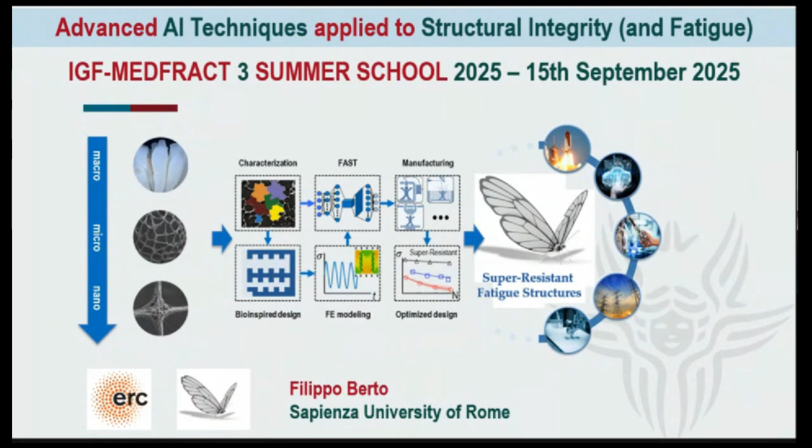Okay. So what I want to mention before is that there are a lot of challenges in fatigue design, and these challenges are at different scales. And so this has motivated us to introduce data-driven methods or artificial intelligence to approach the problem of fatigue at different scales with new advanced tools related to data-driven methods. In particular, what is less understood up to now is how the crack initiates and propagates. The way is still very complicated and depends strongly on the material that you have to treat and to face.

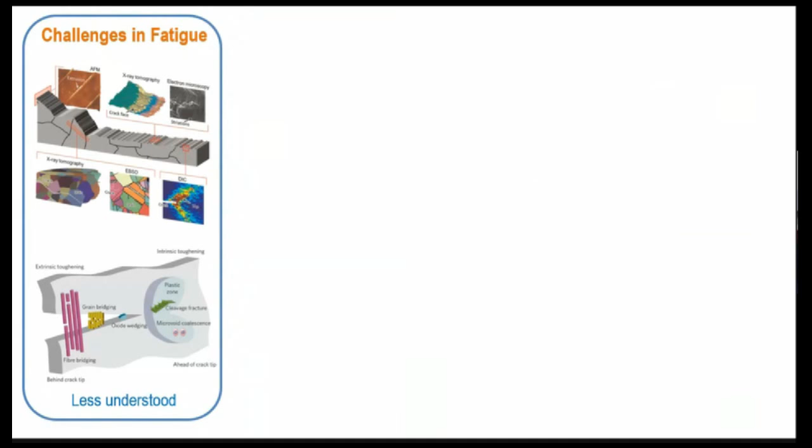In addition, another important ingredient of our study is bio-inspired design. What we have learned during the process of preparation of these projects is that natural inspired structures are really improved with respect to what we are able to produce ourselves. In particular, they are able to adapt to different situations, and for example, they are able to solve the conflict between strength and toughness, which are usually conflicting properties. So if a material is tough, it is not very strong. If a material is strong, usually the toughness is low. But natural structures have the capacity to overcome these issues, combining and enhancing these two properties together.

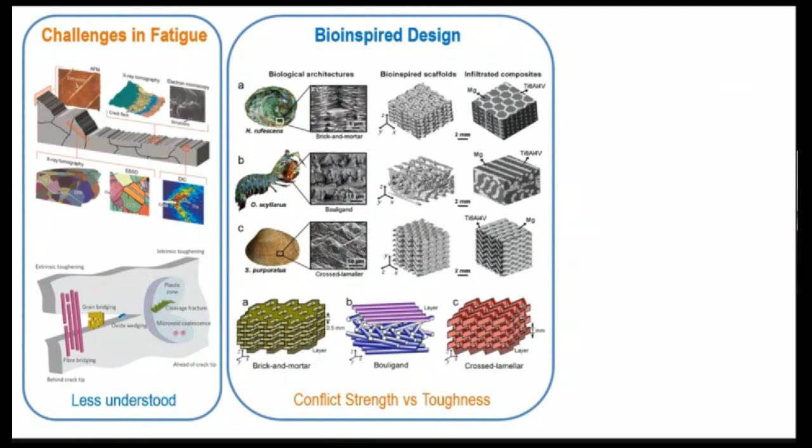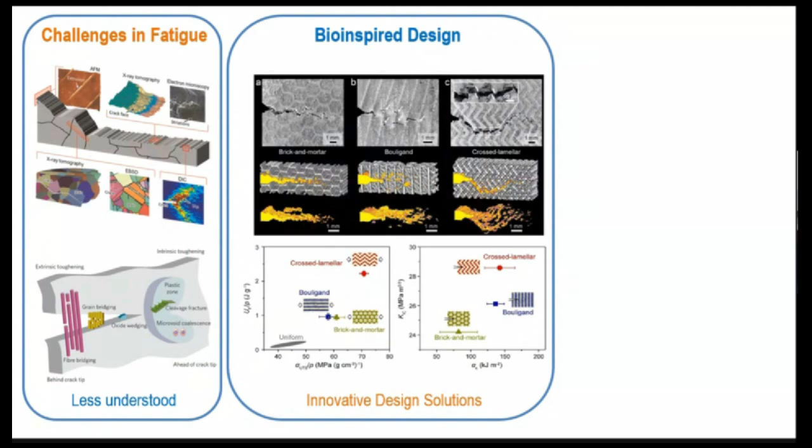So, what we have done as a preliminary study of this project was to study different kinds of bio-inspired structures and to study only the static properties to have an innovative design solution taking inspiration from nature. Okay. But of course, bio-inspired design is still at the beginning, especially dealing with fatigue, and especially in combination with artificial intelligence and data-driven methods. And we have, in fact, the possibility to have a kind of new design space that is still missing, where we can create and generate a new generation of structures able to survive for a very long time against cyclic loading.

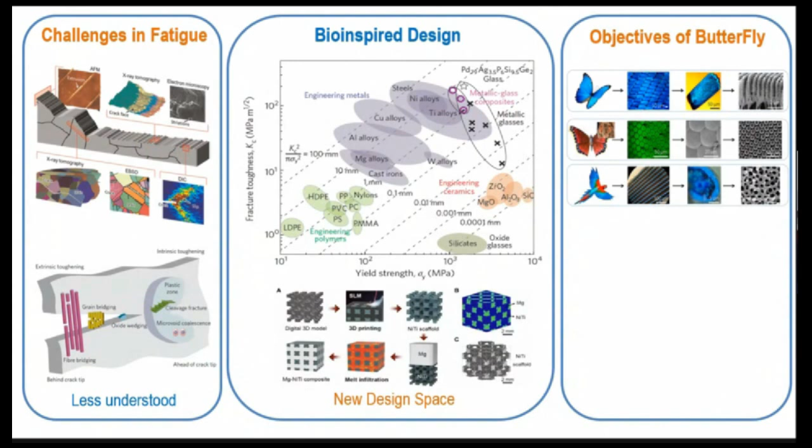So the aim of this project is taking inspiration from nature to design super-resistant fatigue structures. And we have, in fact, different examples of structures where, due to different mechanisms, for example mechanical interlocking or other mechanisms that nature is able to develop locally to improve the fatigue behavior of a structure, we are able to obtain a better fatigue life. This field is a completely new, open research field, and there are very few results, mainly due to few research groups, and I want to mention here Professor David Taylor, who is also attending this conference these days. So you will meet him during the conference. So we have also published some preliminary results on this topic.

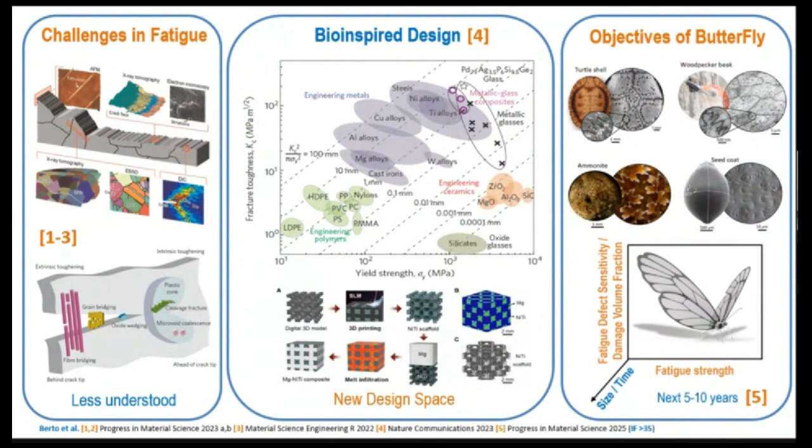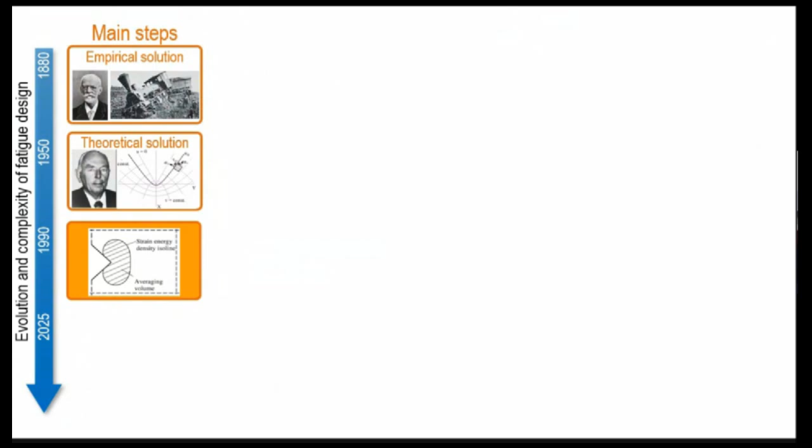What I want to mention is that if you consider fatigue and the history of fatigue, we start with the empirical solution when the first studies were carried out by Wöhler. After that, there were a lot of theoretical efforts to try to describe analytically the solution that can provide us some tools for fatigue design. And later on, we took advantage of numerical simulation and finite element methods. But now, what is happening is that we have the possibility to apply data-driven solutions. And actually, we can have fatigue in a new data-rich world, which can be a kind of revolution for studying this problem in a systematic way.

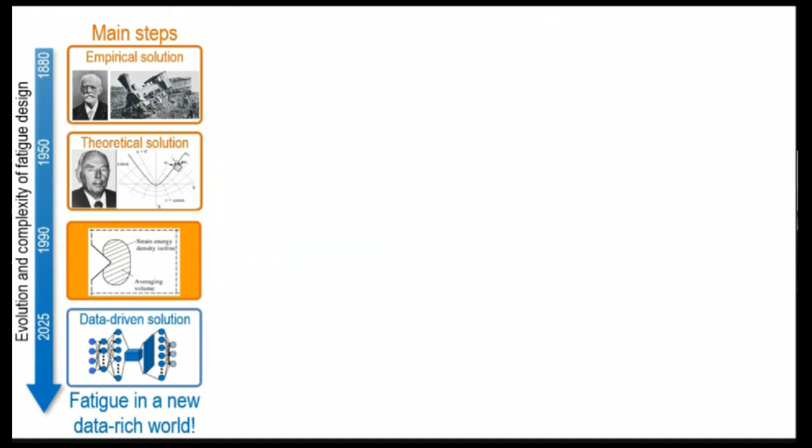Okay? So what we have done as preliminary studies was to study the metastructures of the materials, the constitutive laws, and the load sensitivity to show the feasibility of this project. After that, Marcello will give you some details of the specific algorithms that can be used to face these specific problems, and will give you some guidelines to help you face the problem of structural integrity with the use of machine learning.

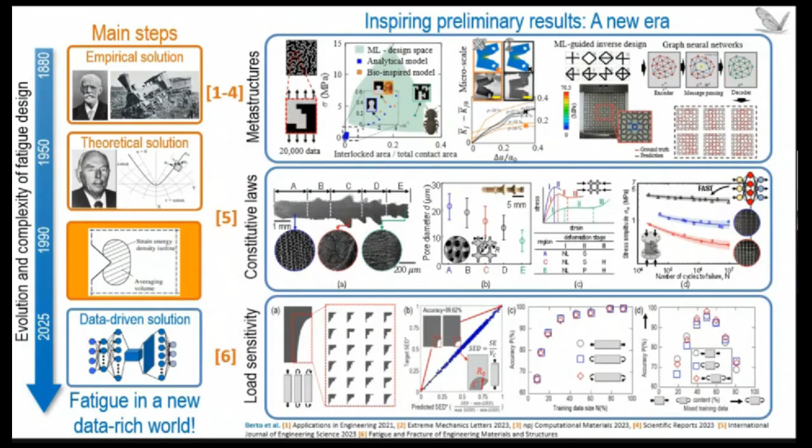Another important part of the project is that it is not only to design a good structure that is the problem. The problem is also the final production of these structures. We have a lot of advancement in manufacturing that allow us to control locally what is happening to structures at different scales. And so if we are able to find a new generation of structures from a design perspective, now we have also the tools to manufacture these structures in a proper way at different scales.

Of course, adding complexity to structures, so additive manufacturing allows us to have complex geometrical features, increases the possibility to have defects, intrinsic defects due to the process. And we need to treat them in a proper way, okay? So, especially dealing with fatigue, this plays a fundamental role.

Why am I focusing so hard on fatigue? Because if you consider structural integrity in general, 90% or more than 90% of structural failures are due to fatigue or cyclic loading. Instead, if you see the studies in the literature, for example, dealing with fracture toughness and fracture strength, you will find that 95% of the studies are on static loadings.

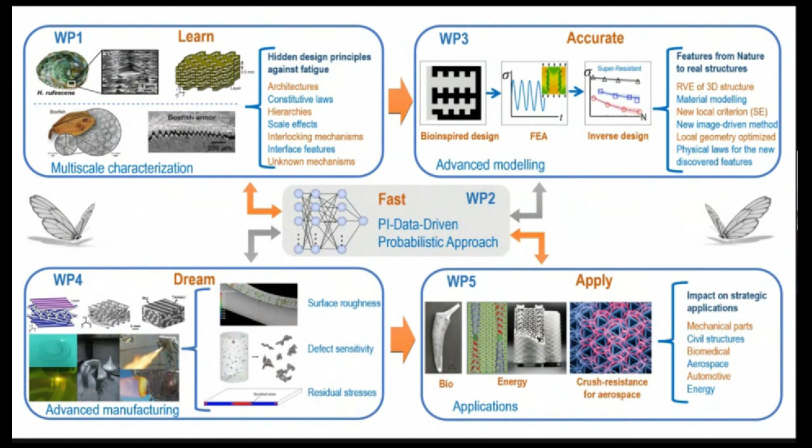Okay, and this is because there is a clear separation between people that are material scientists working mainly on toughness and fracture, and people that are engineers that are working on real fatigue or structural issues. And so what we want to do here is to try to merge these two worlds and try to connect the two parts together. Okay?

So as I mentioned before, one of the keys of this project is that we have different tools to study what is happening at macro scale and what is happening at nano scale down to the atomic scale. Okay, this is very nice because now we can see almost everything inside the material. And so depending on the aim that we have for our design, we can actually reach any kind of scale.

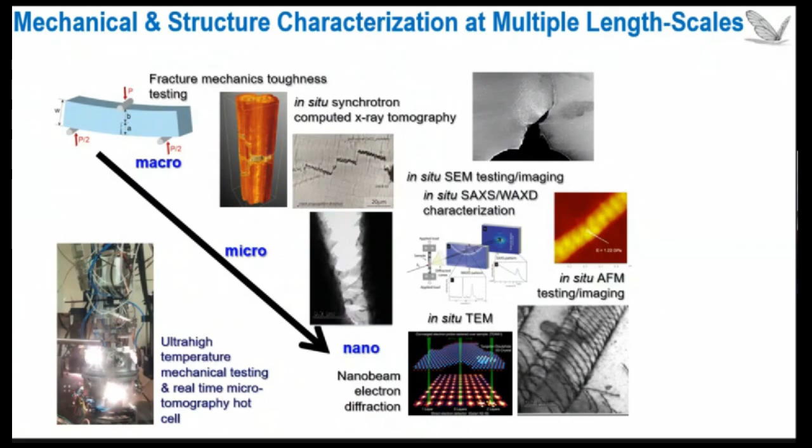Another important thing, that Marcello will mention better than me, is that we have different data-driven techniques that we need to be able to manage. Okay, I will not enter here in the details because Marcello will give you a clear overview. What is for sure important is that we have this classification of machine learning techniques that are available up to now due to different researchers and different groups that have developed different techniques around the world. And I'm reporting here like a summary this slide that, if you want, you can also have after the conference.

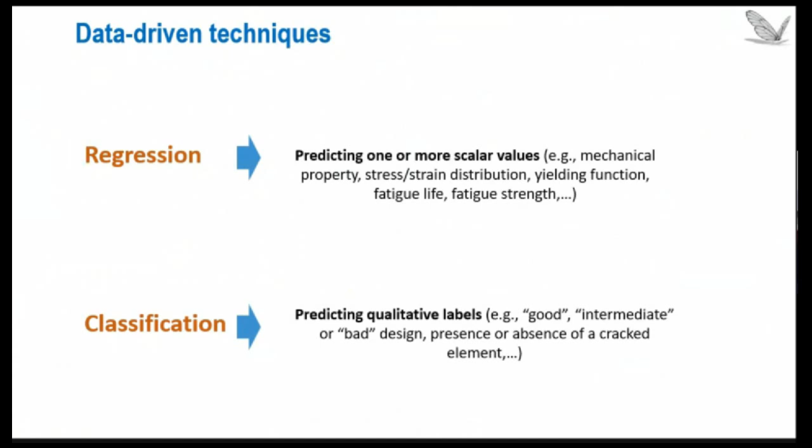Dealing with data-driven techniques, we can have the possibility to make regression, so predicting one or more scalar values from some input data that we have, or predicting qualitative labels. So this is classification, two different ways of approaching data-driven techniques.

As engineers, what we have found, which is very, very important, is to study physics-guided neural networks. Why? Because usually these physics-guided neural networks help us to focus the algorithm in the right direction without wasting computational time and looking for wrong solutions of the problem. Okay, so as engineers, this is probably the best way to approach the problem.

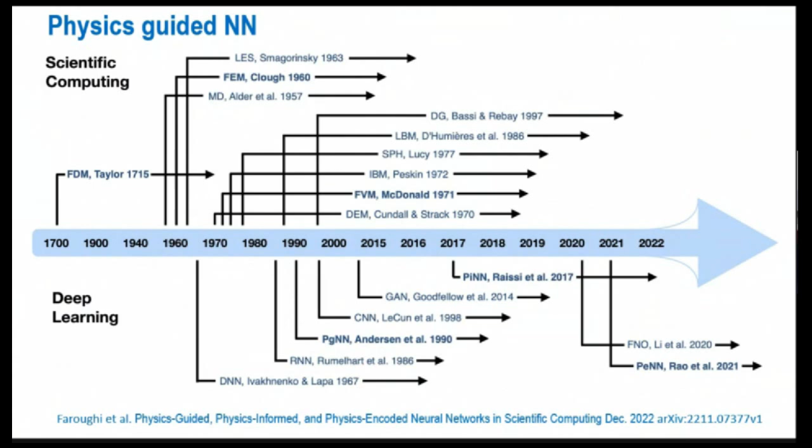Another important aspect is that we have two ways of approaching data-driven methods. The first one is a method that is called structure to properties or forward design. So we have a given structure, and from this given structure, we can extract the properties of the structure. If you look to the literature, 95 or 98% of the works are referring to structure to property or forward design.

The second approach is property to structure. So we want to have some desired or target properties for our structures, and we want to design a new generation of structure that is able to have those specific properties. This is called inverse design. In the second case, there are very, very few examples in the literature, mainly on static loadings.

So here, actually, we have a completely new research field that can be developed during the years. We are now ready with a lot of computational capacity and new algorithms that will allow us to go in this direction of inverse design.

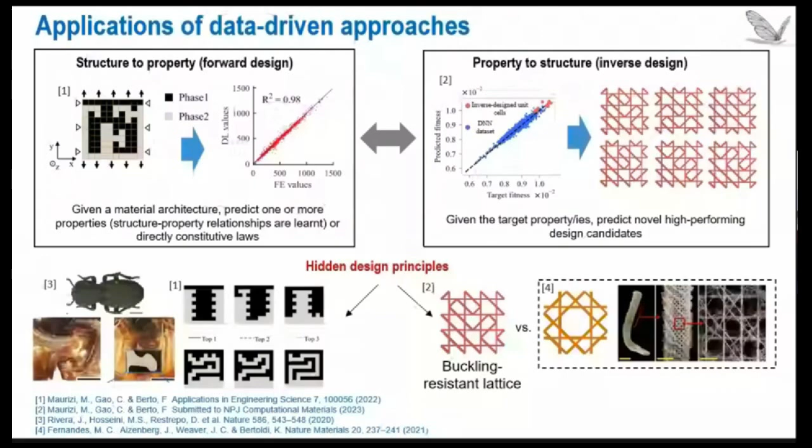Okay, so now I will leave the word to Marcello, who will give you different examples. He will also make a brief introduction about this topic. He is working with me inside this project. He is the best person, developing all the algorithms that we are using inside the project. So I will leave the floor to Marcello to give you a very good overview and very good examples of what can be done with these approaches. So thank you so much.